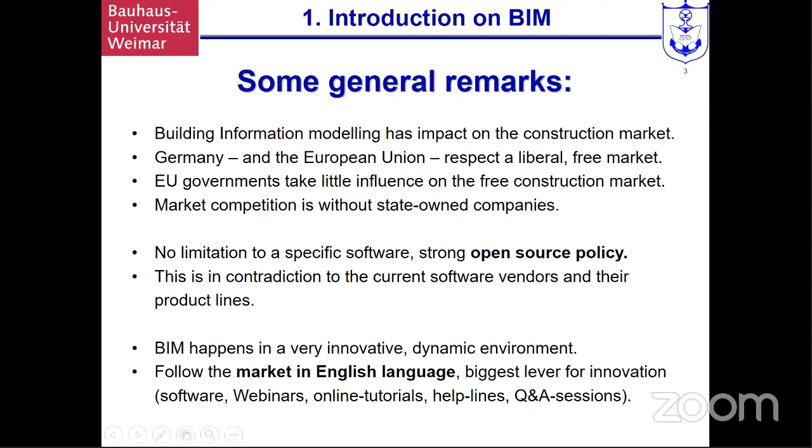Okay, and I try to be very slow. I try to talk slowly so that you can follow, and I would like to show a lot on the slides so that you also can follow along the slides. Whenever I am too fast, please give me a sign that I can slow down again. Okay, let's continue. So I talked about the German and the European market as an open market.

No governmentally owned companies, so it's a free market. The governments say that they don't like to have limitations on specific software. We have a strong open source policy. In comparison, if you talk, for example, to Russia, the Russian government has decided to work with Revit, Autodesk Revit. That's very unusual.

That's okay for Russia, but the European Union will never limit things to a specific software. This is not really what the current software vendors like. They always like to close their products, but that's how the market is.

Now, two other remarks on BIM and the English language. BIM is a very innovative and dynamic market all over the world. What we see as Germans is that whenever you follow the market in English, there is the biggest lever, the biggest source for innovation and information.

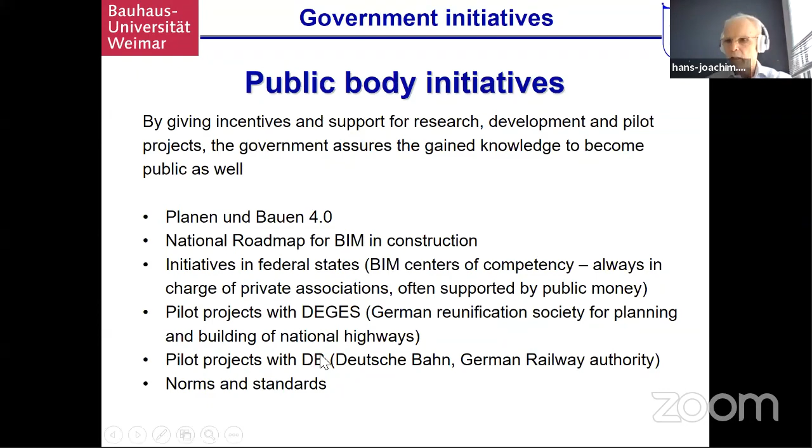This is the initiative Planen und Bauen 4.0, and here you see the link you can use to get all the information about them and what they are doing. In order to get support from the government, we had to bring together a lot of companies—consulting companies, construction companies like Hochtief, Züblin, Strabag, and consulting companies like BTM, Heberger, IBK, and so on. So it's very important to have cooperation.

What you also see in the German BIM initiatives is that people talk a lot to each other, no matter whether they belong to this company or that consulting company. Planen und Bauen 4.0 developed a step or phase plan, which had a preparation phase, a pilot phase, and now it's at level 1 for new planning projects. You can see this BIM Stufenplan at this link.

They list all the advantages which BIM brings, like international competitiveness—which is interesting, because by doing BIM, any Vietnamese company becomes internationally competitive and can work in cooperation with other companies worldwide. Also consolidation of German core competencies, substantial reduction of construction time and cost, and so on. Those 10 points are the objectives intended to be achieved with the Stufenplan, which was set up in 2015.

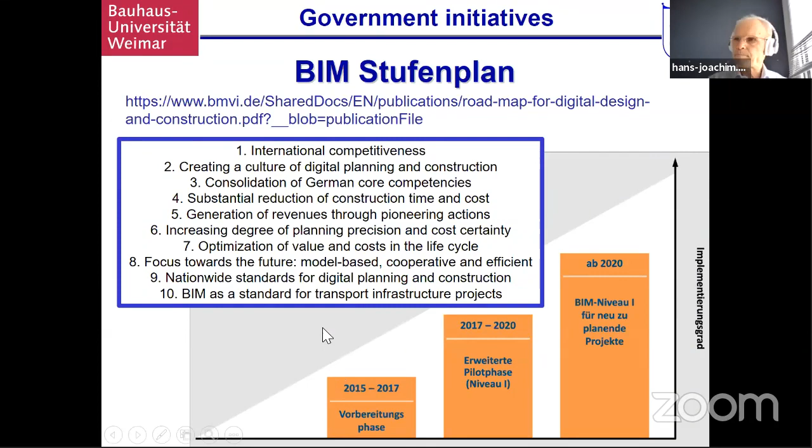I talked a bit about BIM in the construction business, about the roadmap for national construction works. This roadmap is still under construction, which shows the difficulties in a federal state. The federal construction market is very small—most construction with public money is done by states, communities, counties, cities, and towns. So the federal government is very slow in demanding the use of BIM for states, cities, and counties, and that's why this is a slow process. You have to look at the investors and the development.

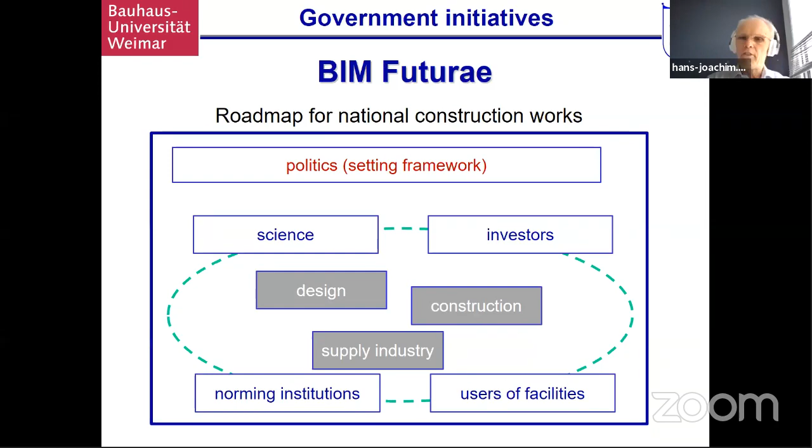The roadmap for national construction works called BIM Futurae isn't really moving further at the moment. What is very interesting are the pilot projects.

Here you see again the two main drivers I mentioned. One is DEGES, the Federal Design Company for Major Roads, established around German reunification to do big infrastructure projects like new railway lines and highway tracks. They started with four well-documented projects, so let's look into one.

That's DEGES, and the other big player is the German railway, Deutsche Bahn. They are very close - Deutsche Bahn belongs to the state but runs almost as a private company. Both DEGES and Deutsche Bahn get a lot of support because they have big shareholders with the government and some states.

Let's look into one of those pilot projects, for example the Petersdorfer See. We will see more slides later, but if you look into this you see how they designed the project - it's a kind of steel bridge with a concrete deck.

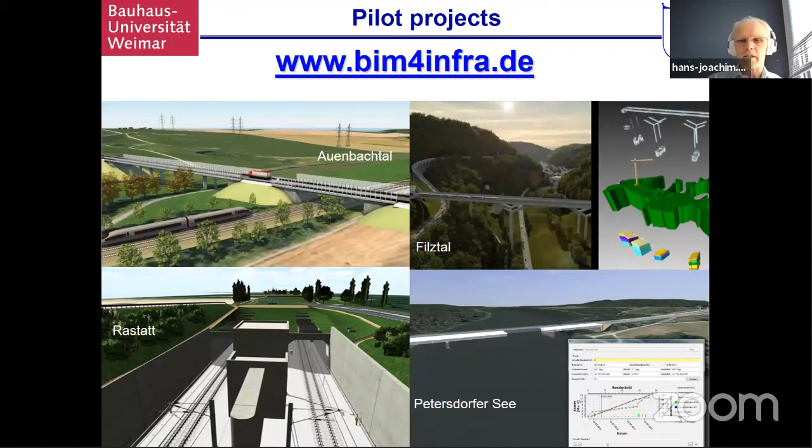I'll show some pictures of the Rastatt tunnel, because there we had some advantages, although it's not the best example. Here you see the tunnel, which runs very densely along or underneath the existing railroad, crossing at an angle of less than 5 or 8 degrees.

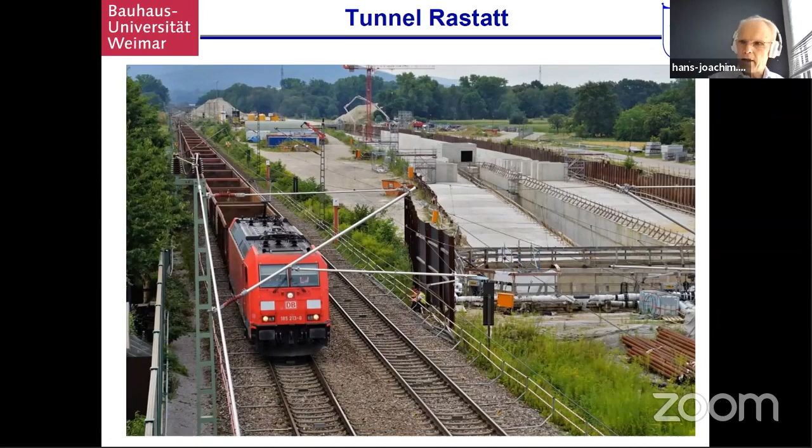They actually had a big failure without any fatalities. That's where they were very lucky to have all those models, because they could go into the analysis very fast. What happened was they used a freezing ground method, and the shield they had to freeze in the soil was not thick enough.

So they had this accident where they had to close the existing railroad and then reopen it after repair. But at the moment the accident happened, everybody knew what was going on, knowing what was in the model - everybody was pretty clear about that. So there was still an advantage to having good pre-documentation through building information modeling.

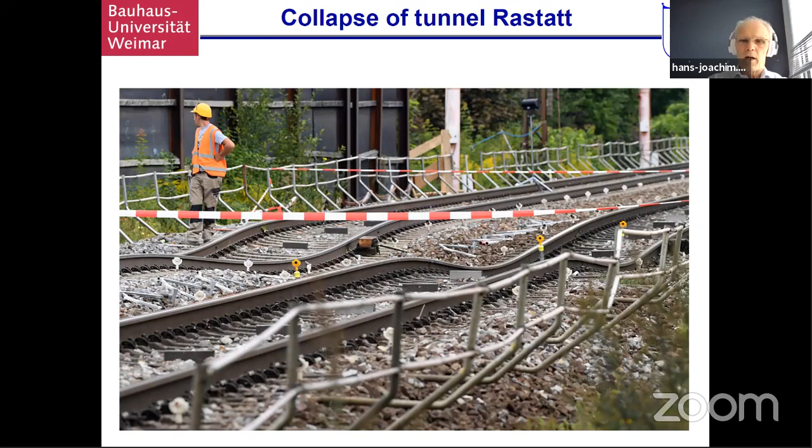Let's look further into BIM4INFRA. If you go into this link, you can get a map of German pilot projects, because there are more than those four now. All those pilot projects from Deutsche Bahn and DEGES are documented, because the government pays for documentation, transparency, and parts - it pays for the extra effort to share knowledge on those projects. It's interesting to look into that and explore those projects.

That's why I gave you a lot of links, and I think that's very helpful. If you look into more detail, you see that Deutsche Bahn, the German railroad, as well as DEGES, are pretty open in showing their standards.

Here, for example, are requirements for the application of the BIM methodology. Deutsche Bahn and DEGES are very important clients who want to get on board with building information modeling, so they publish what they require and what should be done - these are requirements for applying BIM methodology for companies that want to work with them.

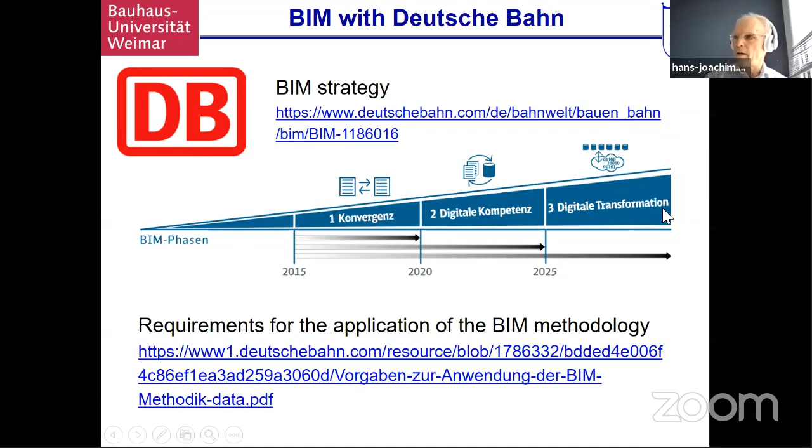What you see is BIM for the Bahn, a current development stretching from 2015 to 2020. They have digital competencies and do a lot of training within Deutsche Bahn and within DEGES as well, to learn how to use building information modeling. From 2025, they want all projects done with BIM. DEGES as well - they just started a huge qualification program to make their own people ready for working with BIM models as normal.

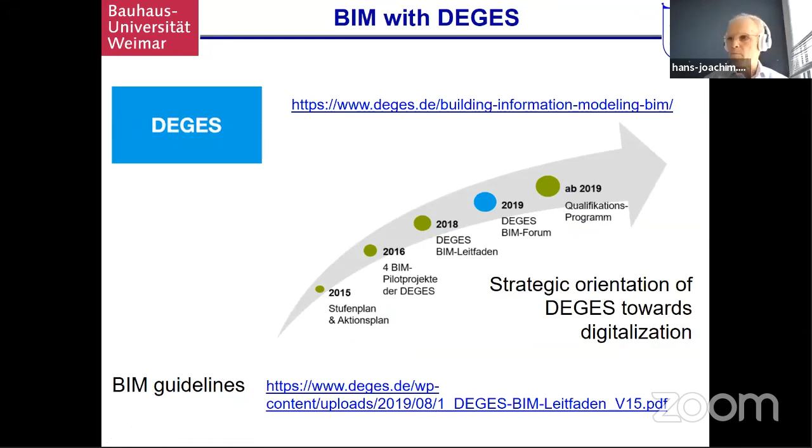Okay, the last thing I would touch here in this first session would be that I tell you a little bit about the hierarchy of the norming, because as I told at the beginning, we keep very close and incorporated within the European Union, although it's a federal agreement. It's a voluntary agreement to stay in the European Union, not as the British people. They just dropped out of the European Union, but we want to stay together, and therefore we want to align our standards.

But standards means that there are a lot of specialists who try to bring together the maturity of knowledge, even in BIM. This is very difficult in the building information modeling market, because building information modeling is still very dynamic in the development. So there are a lot of things happening, and a lot of software, a lot of ideas, a lot of new standards.

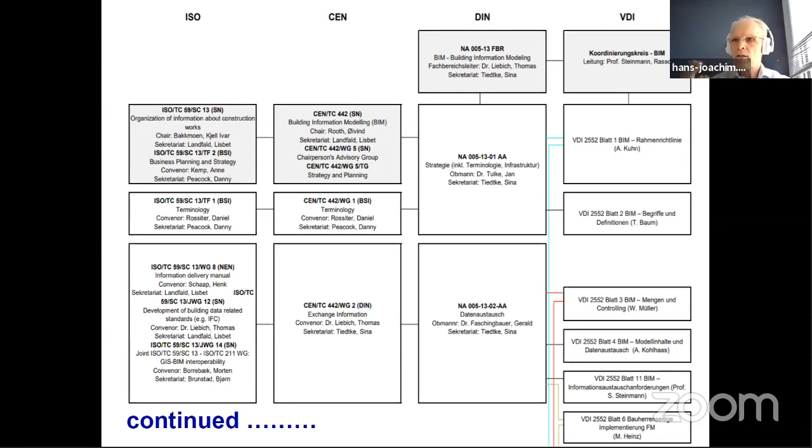So, because then we always look at those people working on the VDI 2552, that they correspond, and sometimes we have even the same people in there with the corresponding DIN norm group and with the corresponding CEN norm groups. There's a lot of talking within Europe and also internationally to get the same norming, in terms of international standards, exchange of data, data catalogs. It's very, very important to look into international norming or normalization so that we can exchange those standards.

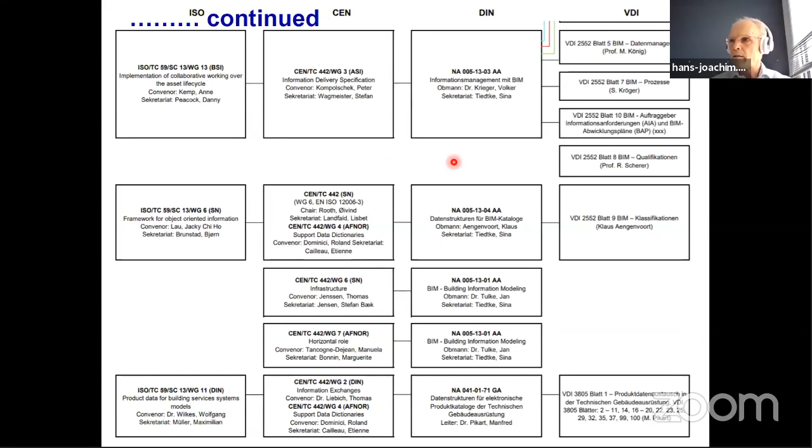This is the second part here in enlargement. I would like to come to the specialty of the German VDI Richtlinien Series 2552, because that's, as I said, not so much aligned. They have been very fast from the German Engineering Association, and they also have an English version.

I always look for things to find in English for you, to find information in English. This is, for example, everything which is intended. You see there's a draft, but it will come out in 2020, and there are others which are already there: 2018 part 5, BIM data management, and we will later look into part 8.1 in the next session.

Also the German VDI Richtlinien, when they are finalized, that means when they are published - Part 3, Part 5, Part 8.1 - as soon as they are published, they will also have an English version.

One of the last organizations which is very important also for our BIM development in Germany as well as worldwide is the Building Smart organization. Actually what they say is that's the benefit for the built asset industry - Open BIM. Building Smart is really the promoter of open BIM. So whenever you do modeling in one version, you have IFC or international standards to put your data out of this model and get it into another software. That's actually the main part.

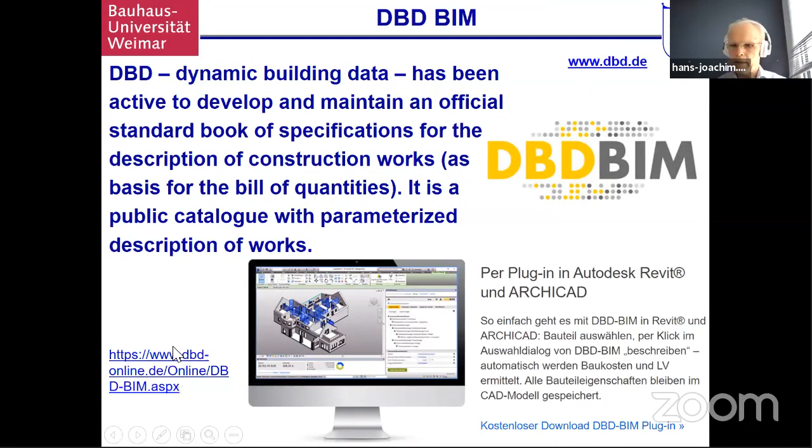I would like to make some side remarks at the end of the first session.

Norms and standards are really the result of consultation with all interest groups. That means you just cannot act and make a norm. The benefit and really the added value is if this is agreed by many parties, most of them. That means internationalization, international alignment and asserting one's own interest is an objective. So we are working on ISO and European norm standards because we want to present our own interests within this group. We want to make norms which are appropriate for Germany, good for Germany, which also respect our advancement. That's why we work with ISO, with EN, and of course with DIN.

BIM and the BIM market is a very dynamic area. That's the reason why there is no really finished handbook or finished guideline. We are still in a market where so many new influences are there, so we shouldn't cut off the development. There are lots of specification brand solutions, software houses that are very fast in developing, but they are not very compatible to others. So that's really a problem. And if you look into the IFC certification, we see that IFC is respected, but lots of software don't support all IFC features.

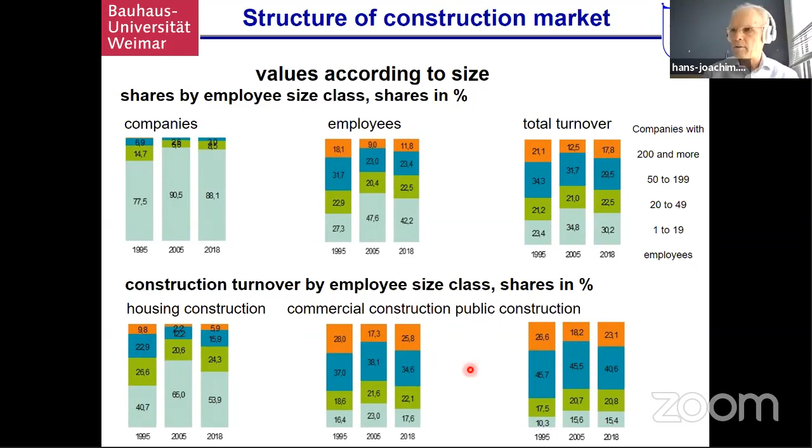And then we have the numbers by housing, commercial and public construction, which is not important now. So BIM is a marketing issue in Germany now.

Although the market is atomized, the big construction companies invest in BIM divisions. That doesn't mean that they know how to do BIM and that they do BIM in all facets. The big companies have a BIM division and they do nice pilot projects or marketing projects in BIM.

They are sometimes working as internal service units, but the rollout of BIM within big companies is pretty difficult. It's still difficult, like the rollout in the government.

So they have the BIM divisions, and the major market demand for the companies is from client requirements, as with the German railroad, automotive production, as I said with BMW, or chemical plants, where high standards and high security standards are required. And there we know that BIM is really the big solution to work with.

When you talk about BIM, big construction companies started to apply building information modeling not for any projects. They started to apply it for their own turnkey projects, because they knew that the highest risk for a project has been in turnkey and design-and-build contracts.

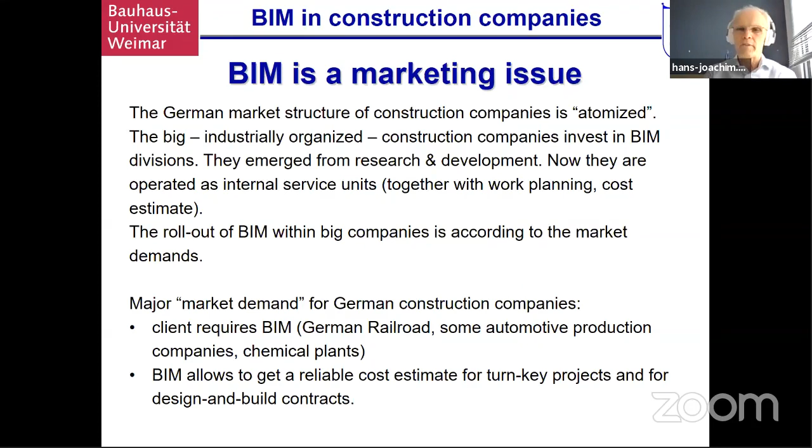So the companies wanted to know in advance how they could achieve reliable costs. They found out that BIM modeling, working with an object-oriented model, was the best way to achieve reliable cost estimates.

BIM in public authorities, I just mentioned it as a tough question. It's really difficult because we have decentralized public authorities in the states, counties, cities, and smaller towns, and the co-financing with national funds, if you get national funds for bridges or whatever, does not impose use of BIM.

So that's really a devil's heel here. We are not very content with the situation there. They pretend lack of awareness, lack of technology, lack of time, lack of training, lack of digitization, lack of interest, and they dispute about legal matters, copyright issues, and responsibilities.

As soon as you come to public authorities, there are lots of arguments why it doesn't work, that it's totally different to private industry. In private industry, they just say, if I earn some money with that, if I have some advantages, I just do it. But public authorities, even now with the corona push toward paperless or home office, they might improve with paperless procedures, but they are looking for binding directives for property rights.

So there are a few grassroots initiatives, I've called them, like the digital building application and building permit. The young employees, even in authorities and governmental companies, they just want to do something with BIM.

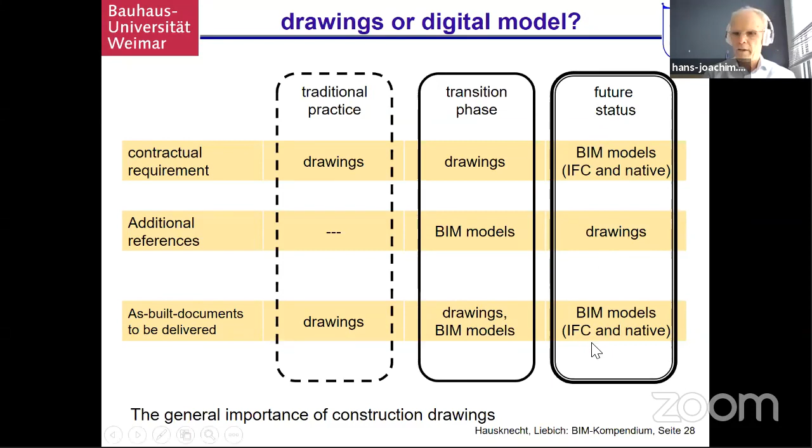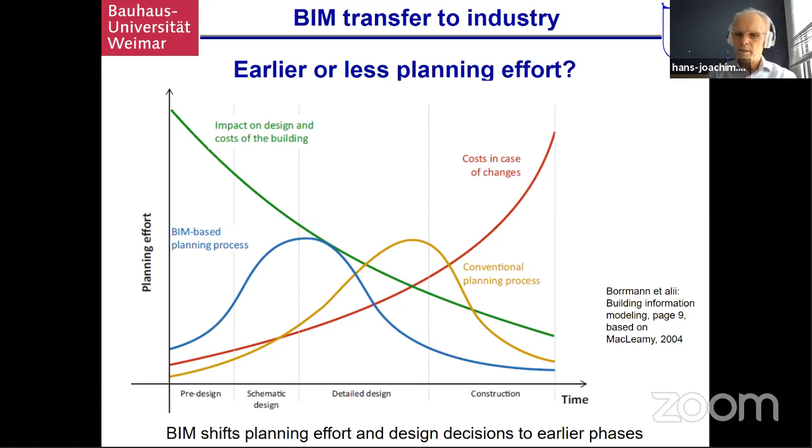I'm very sure that at that time the planning effort will be less in total, no matter who does the planning. The effort will be less, and we will use this gap - the gap that comes from here to there - maybe to make better planning, to make better alternatives, to run comparisons and so on. So I'm very convinced that BIM will save time and effort in the future.

Now to the industry - we know that industry has difficulties taking the steps into the BIM world, and that's why we also design projects together with industry. We have formats like group projects with 3 to 6 students assigned to supervisors from the company and from the faculty, with a 15-week work time, meaning a workload of 250 hours per student. It's a really heavy workload where students do an on-site, hands-on project with a construction company, and the company is also interested in getting this information and this combination.

We have a company called Town and Country - they do individual houses, and for the last 2 or 3 years we've already done projects with students. Each time they improve their BIM status and are getting very close to real automation in design, development of standard houses, up to checking sites for which house model can fit on the site. So they are really pushing their own BIM competency, and they benefit from the solutions our students developed.

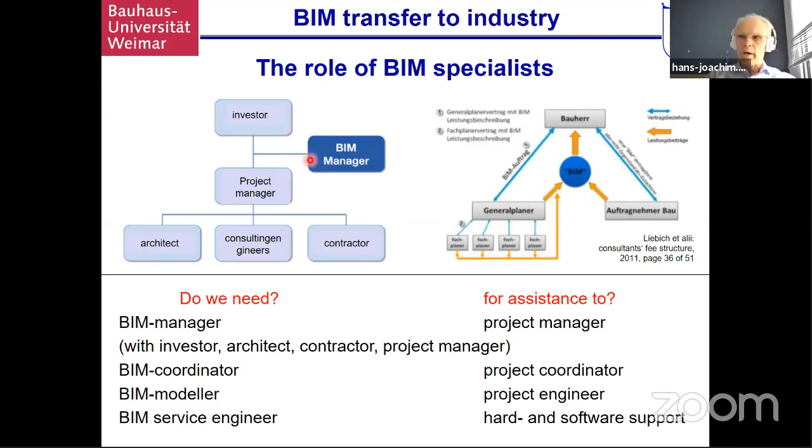So I'm not really supporting this way of looking at it, but at the moment it really works like that. When we have a graduate, he goes into a company or to an investor, then he will be the BIM manager. Very often he will be the BIM manager for the investor, the project manager, and for a contractor at the same time, because only one has the BIM competency.

BIM in small and medium enterprises, we see they have real difficulty because the companies do not know what software to buy. In big companies, the laptops are locked, secured against unauthorized software installation. So small companies and big companies both have problems getting into the BIM world, either because it's too expensive, or because company guidelines don't allow installing open source viewers, BIM viewers.

We have the advantage of cooperation with companies, and the advantage that we have full education licenses for software. So we can play, we can try out software, we can compare software. And of course we don't have locked computers or locked laptops. We like to run the risk, and we try on our laptops what is possible. And if we have a bug, then it's our problem.

Very often we cooperate with companies where we say, please put an extra open laptop for the student on the desk of the student so that he can work with it, test, and try open source software without infecting your computer system in the company.

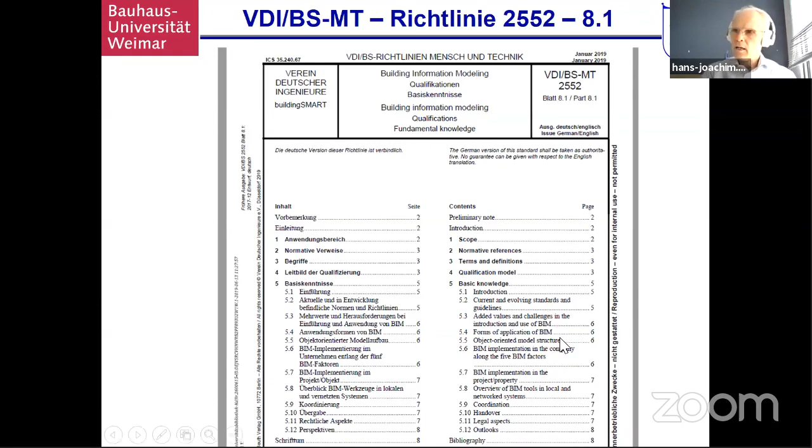Now I show you those 12 parts. That's a way to standardize the education outside of universities, for the industry. And that's what we are also talking about with the University of Transport at Ho Chi Minh City, to set up kind of a basic knowledge course for the local industry and local consultants.

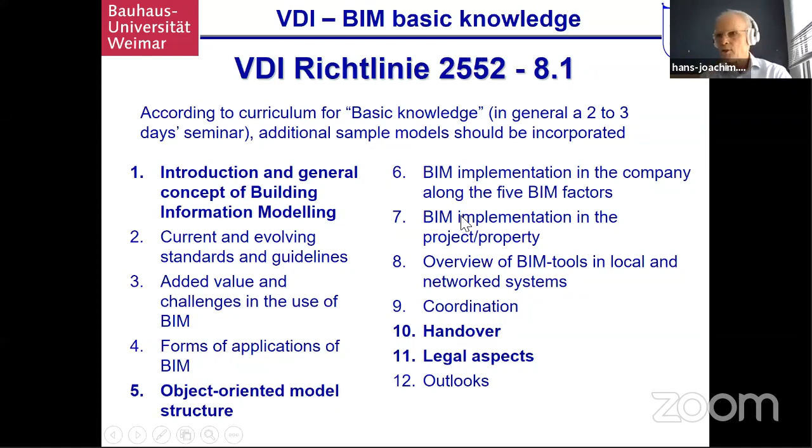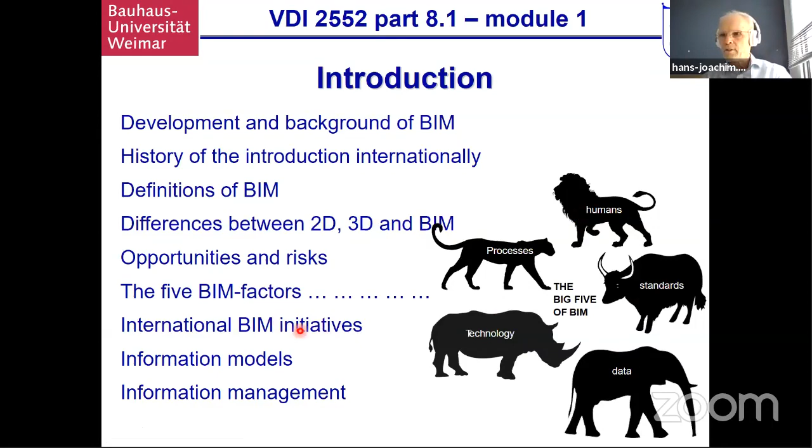I just put out four aspects to show you what is in there, what we have to cover. The introduction is just the background, history, definition, the BIM factors, technology, process, humans, standards, and data, and so on. The international BIM initiative is more about where you find information.

Then the object-oriented model structure, that's requirements in terms of performance and memory requirements, model structures, unique identification and classification—that's IFC, for example—integrating of disciplines, content structure, granularity, those levels of detail in geometry and alphanumeric information.

And finally, the very important libraries and product catalogs, because we need product catalogs just to do standardization. If you work on an office building, you have so many items, objects which are similar to the last office building, that you rather work with product catalogs than doing those objects from scratch again every time.

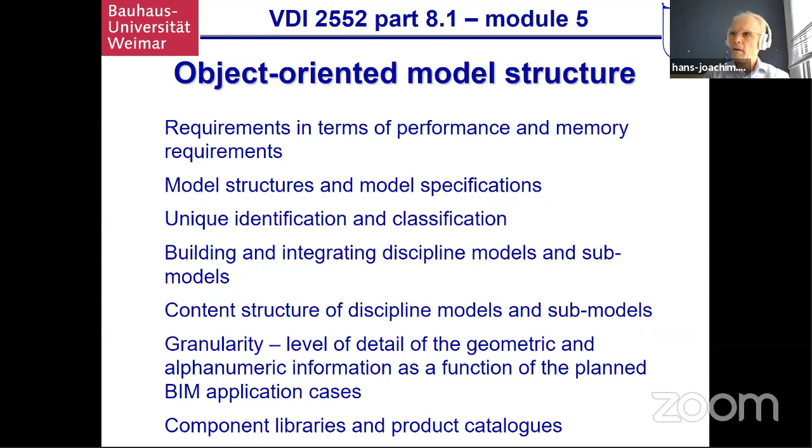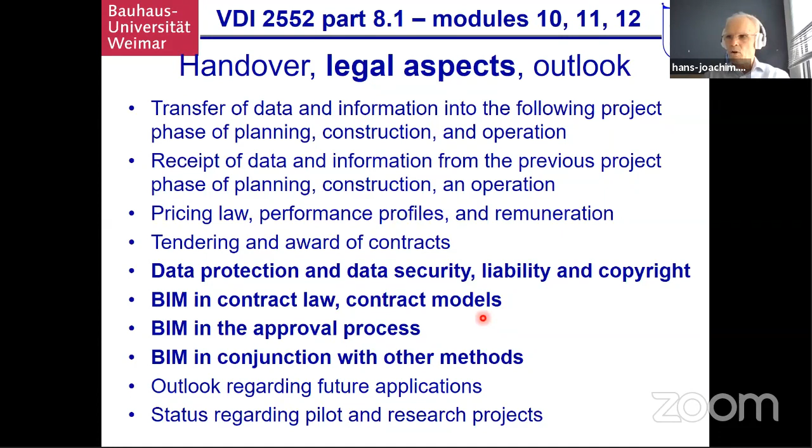The legal aspects—I just wanted to show you the legal aspects from this part, what we cover: data protection, data security, copyright liability, BIM and contract law and contract models, where to put it in and how to organize it, approval process, and in conjunction with other methods.

Finally, I would like to show you a little bit about our research achievements and research topics, which we do in Germany, or which we have done at my chair during the last one and a half decades.

I already started with a very early gaming, actually a gaming dissertation. It's a PhD work to specify the execution status by interactive modeling on a virtual construction site. Mr. Blickling is nowadays really in virtual construction, showing on a film and on a play how the construction will go. So by just playing it in a virtual environment, we check on the plausibility, we check on the reality, we check on the interactions, on conflicts and all that. He started in 2000 actually, finished his PhD in 2006 on just working with gaming software.

At that time, we didn't have too much powerful BIM software, so he went into the gaming industry, computer gaming, and worked there on that.

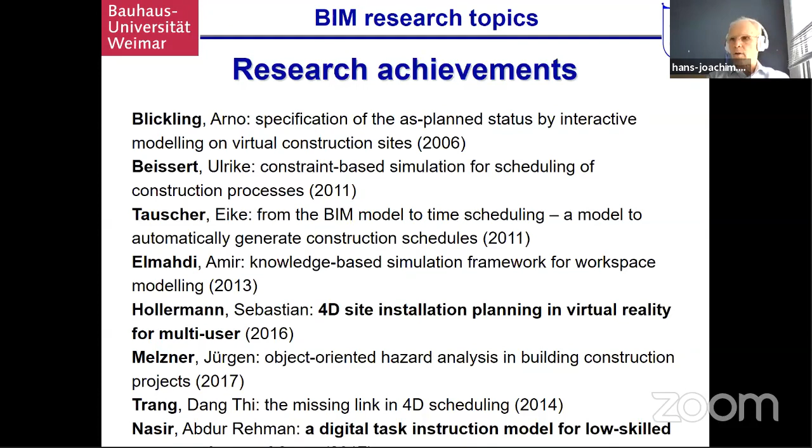What are the main topics? As I said, my motto is you can do any topic as long as it's with BIM, because there's so much to develop and to detect. And when my colleagues from structural engineering complain that's not science, then I tell them that in the 80s and 90s, there was a finite element method developed, and almost every PhD thesis in structural engineering was something with finite element method.

Now I think this is just repeating. Next

There was a statement of Culmann around 1850. He said the language of the engineer is the drawing. I don't believe it anymore, because the modeling, the BIM modeling, the visualization, the rendering, and all other possibilities like working with false colors, working with walkthroughs, doing scheduling, showing different alternatives, that's so powerful nowadays that I think the language of the engineer will be the model. That's actually much more powerful than the drawing, because the drawing is an artificial language, whereas the model can be a real model, looking like reality.

Next two things, remembering this. One is the Singapore people who seem to be pretty at the forefront of digitization. They just say they are looking for low-hanging fruit. So they are just looking for what can be easily achieved with BIM. They don't go for the BIM for everything. They just go for digital models where it's appropriate and where they gain some benefit of. So actually look for the benefits of the individual involved, look for the benefits for your company, look for the benefits for your consulting processes, for your consulting design. And finally, when the client is willing, when the other partners are willing also to work on building information modeling, then you will double your benefits, you will have much more benefit, but nobody, no company, no client will start building information modeling when they don't have any benefit of that.

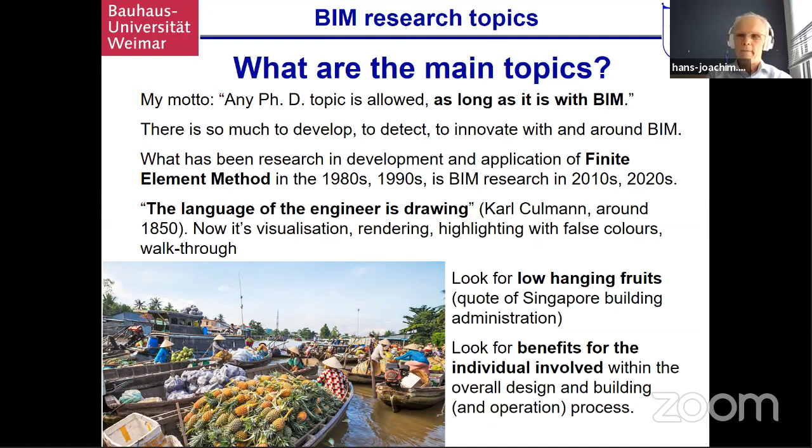Some research topics which we do at the moment: building permit process, standardization of employer information requirements, work progress control of earthwork. This means how can you get the actual status and how can you compare this actual status automatically with what should be built at that time. So that's incorporating not only building information modeling and a model, but also in situ laser scan and other ways. This is work together with a big earthwork company, so they are really pushing to apply it directly.

Then we have site installation simulation for tower cranes. This has been some work for Mr. Lin from somewhere in the middle of Vietnam. Then we have data capturing, data storage, data compression, and data transfer, which my assistant Sebastian Zeiss is doing.

We have noise reduction on construction sites. Noise reduction, that means in Germany we have lots of restrictions, and they now come also to a construction site, and they require us to think about lowering the noise level during construction. That's a mandatory legal issue. And so we look from the model again to forecast what kind of noise will be there, what kind of noise reduction measurements could be put in place.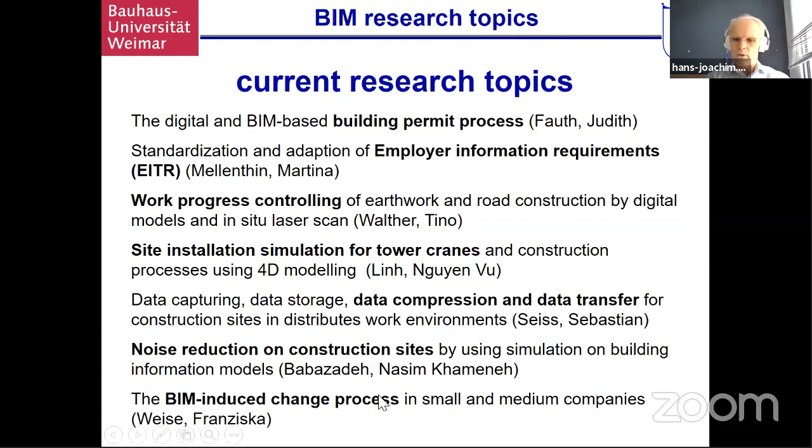Okay, it's all nice, it's lots of work, even in Germany, but we have small springs, we have lots of small areas where lots of BIM is developing. And I think within the next 5 years, we will get this cooperation, we will get this complexity that more and more companies work together with the same complex model for the same building.

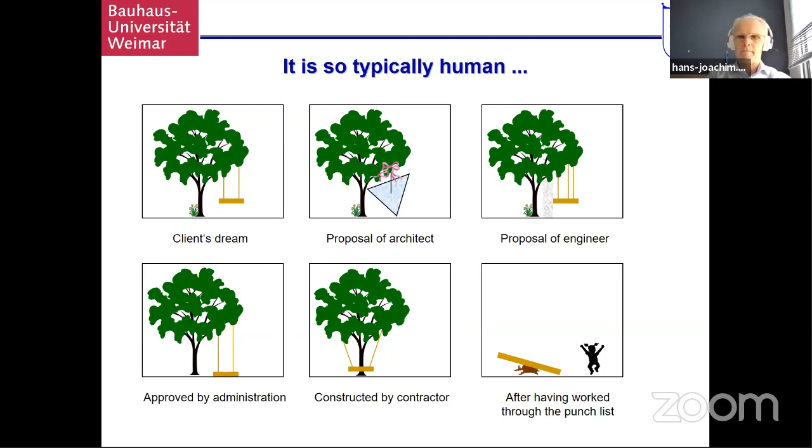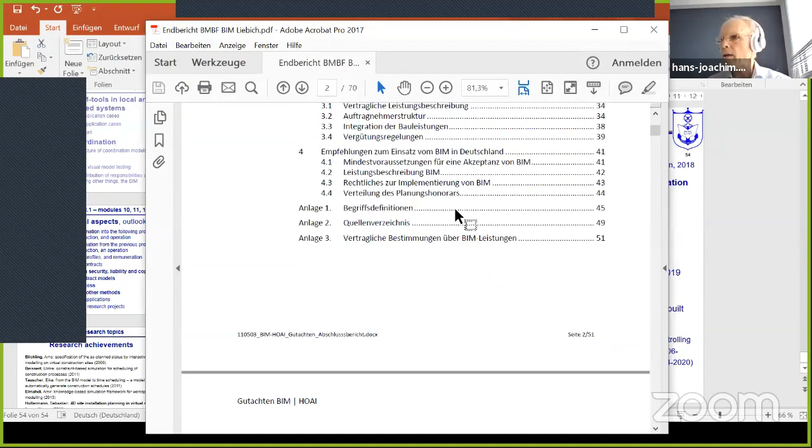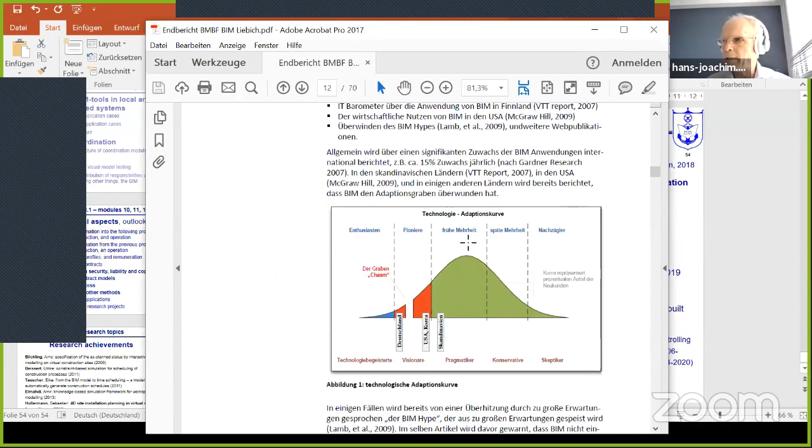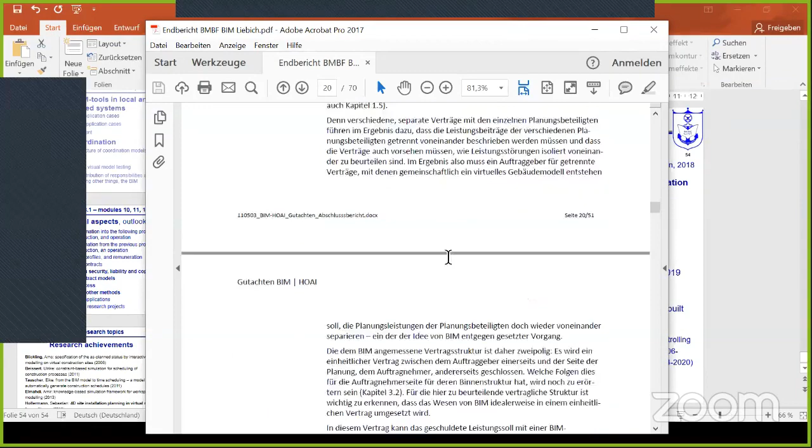And it's a German report from 2011, only in German, showing... I just want to see the structure. Oh no, they just say here, I don't think they have put some tables on that. They have no tables. They just say that we need more money in the first phases, and then the money can be saved in the later phases. But I just ran through it, no table, I don't think they have any. Any formula? It's like the same approach as in Singapore, I think, that they move 5% upfront.

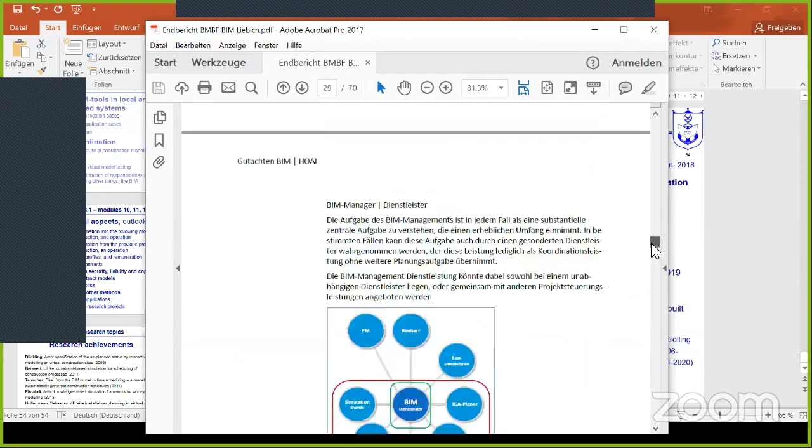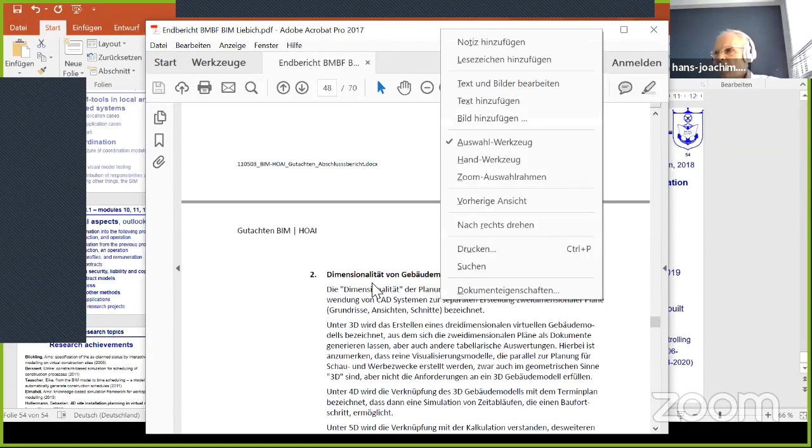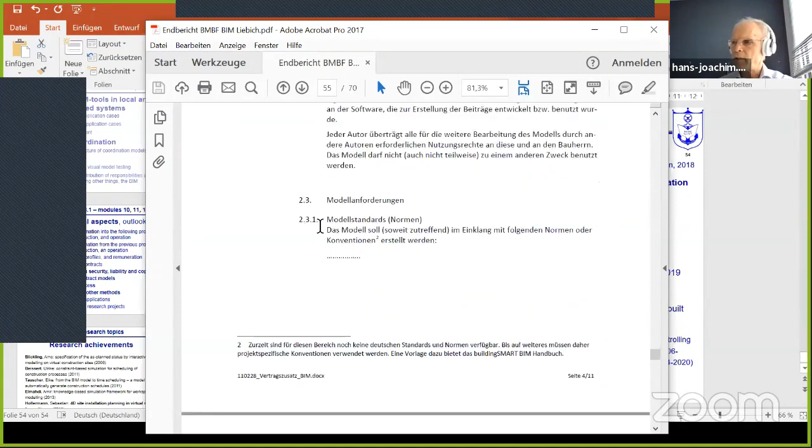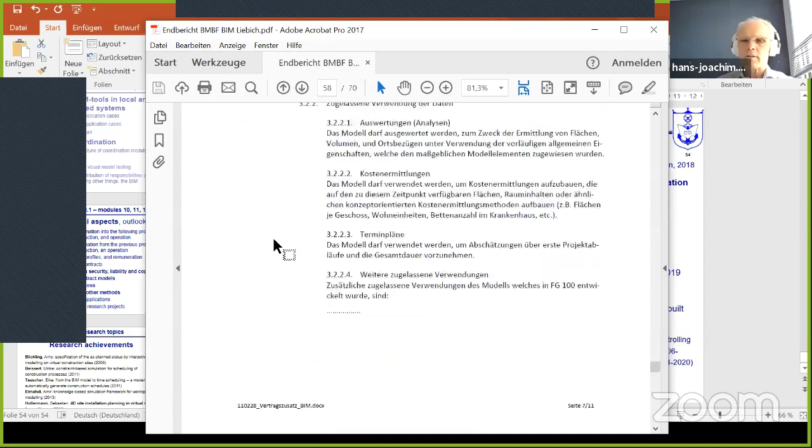I'm really not supporting it. I think it is still from the thinking that 'I do my work and you don't get my work, you don't get my result.' I think it's really from that part of thinking, because in the new world of Building Information Modeling, you will share your results, and not only your results, you will share your model. But this report was done at a time when architects and consultants still thought, well, if I do something which is of value for the other following partners, then I should get remuneration for it. I think that's not the right approach, but that's my personal opinion.

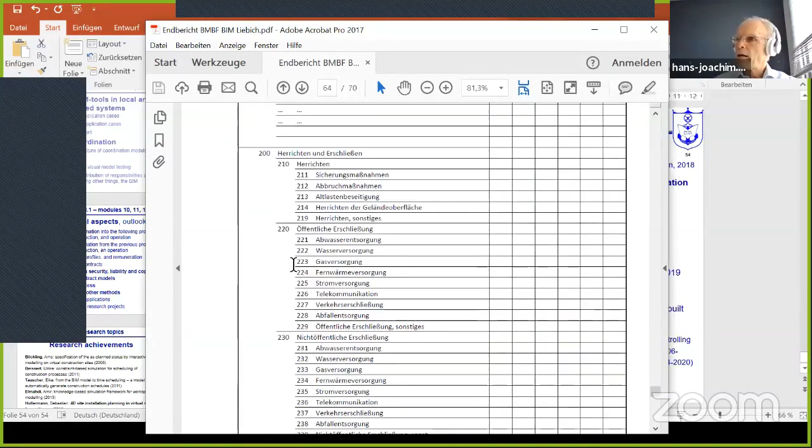I know they don't have any real values, they are just very careful with that. We did a master thesis about that, and this student came up with some values, but I had to point out in the defense that he just picked them by talking to a lot of architects and engineers. He didn't ask the clients and he didn't ask the others. Because if there's more effort, more cost for the consultants, and less cost for the construction companies, then this should be proven by better prices for the client, shown by better prices of the construction companies.

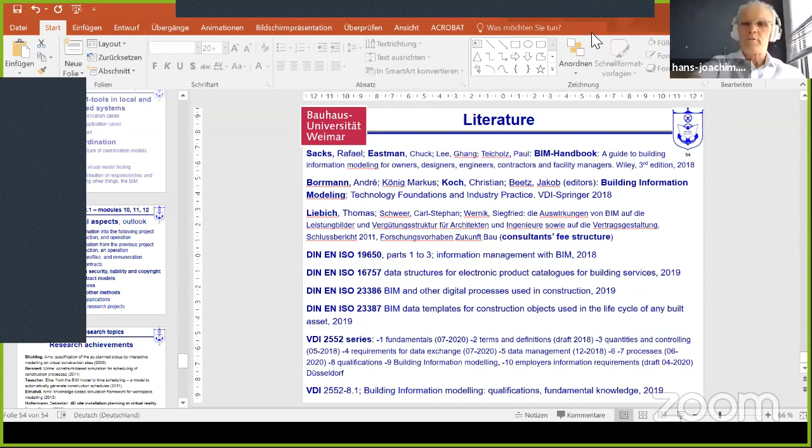But it's really my personal opinion. There are lots of consultants who say we need more money.

Okay, thanks. And another question for my colleagues, do you offer scholarship for PhD students? You do? Or do they have to apply through the DAAD?

What I had in the past, I had 3 students who applied with the Vietnamese government. Mr. Chung was one of those from Vietnam. So I think the best way is really to apply with DAAD or with the Vietnamese government for funding. Otherwise we always run short of people who know German, because we also have some German students who have to be supervised.

Have you heard about the DAAD scholarship? Yes, but I don't know who is the selecting body - is it the Vietnamese government? I think it's the German government, but then it's the DAAD. I'm not sure whether you have to apply directly to the DAAD or whether there is a pre-selection by some Vietnamese board.

I got the application directly from the students who wrote me and said, 'Would you be able to supervise me?' And they said, 'I get a DAAD scholarship.' Because one of the conditions for getting the DAAD scholarship is to have a professor at a university as PhD supervisor. That's what we did - what I did voluntarily, and had some good assistance with this. Okay. Okay. Thanks a lot.